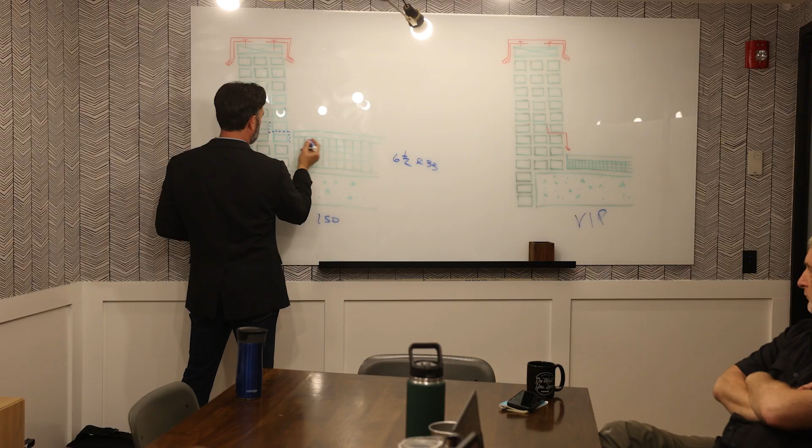I'm gonna ghost this in. So right now, down here is our existing. That's our existing cap flashing. We have 3 courses. So we go here, back here, 3 courses below the cap flashing. That's 8 inches. That's our old cap flashing. This is 6.5. This is actually going to get us somewhere, technically, somewhere over here.

A little bit lower. Now, why am I correcting? Because we're going deep in the weeds. We are going to go deep in the weeds. Okay. So that would be the polyiso choice. And as you see here, if the membrane is here, we have no base flashing. So we just said we need 8 inches of base flashing. So we have to go up 3 bricks.

Here's a rule of thumb. 3 bricks equals 8 inches. It's a rule of thumb. So that would put us up here. Minimum. Now, the question becomes, I only have 3 courses left. To do an in-wall cap flashing, and we're putting it here, I'm ghosting it in because we're not done yet. Now these bricks here have to come out.

How many courses of bricks do we need to take out for the in-wall cap flashing? I already gave you the answer, but 3. 3? 1, 2, 3. Now we have nothing left. There's nothing left. We got the coping up top. That's it. So what's the point? What's the point? This is where we're going to go deep.

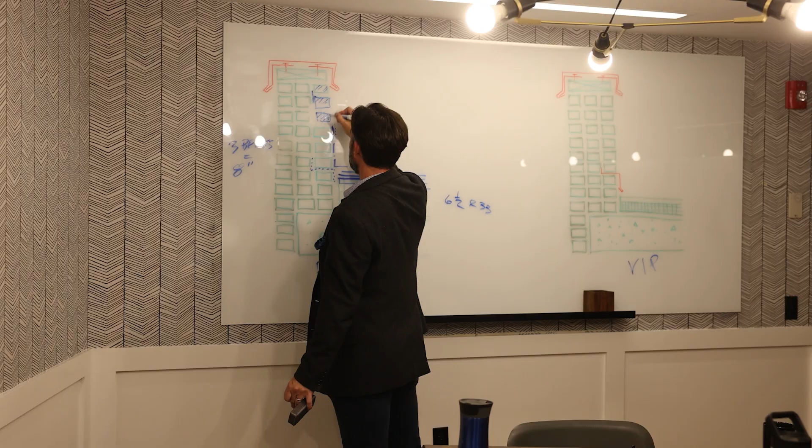And, if we were really going to do this right, we would have over here your weep tubes and all that other stuff. I don't see the point. So what I would prefer to do in this scenario, you know what? Let's leave it up. Let's leave it up because we're going to go to choice B. All right. This is choice 1, which I don't like. We're actually going to modify this.

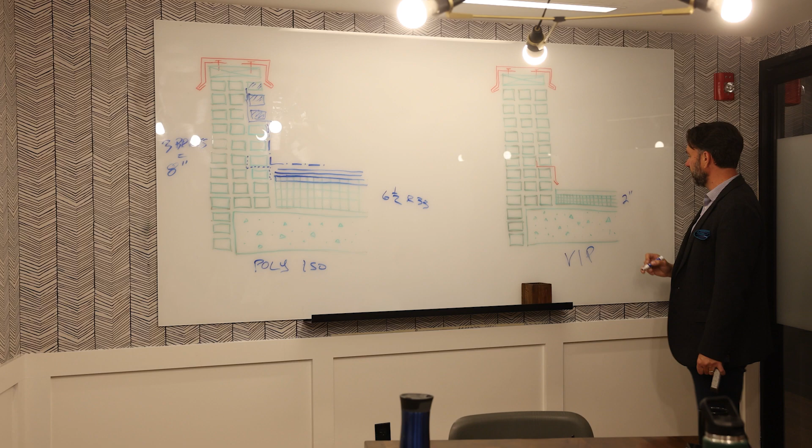Choice 2 is the vacuum insulated panel. This is a 2-inch panel. You have a 1/2-inch cover board. We're going to put a vapor barrier on the concrete deck. We're going to turn that vapor barrier up. Makes a tiny little bathtub. Actually, I would bring it all the way up. Boom, boom, boom, boom, to here.

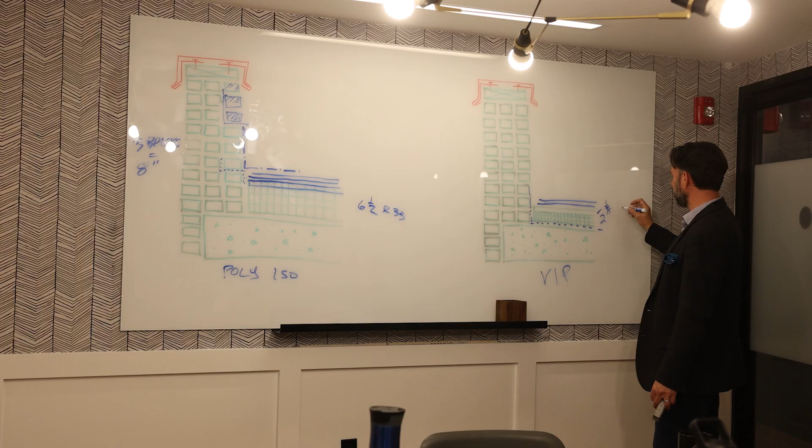Then, oh, wait a minute. Oh, here's our 2-ply. Oh, wait a minute, the cap flashing is in the way. So we still have to take the cap flashing out in this scenario. All right, so if this is 2 inches, 1/2 inch cover board, and then you got a couple of plies, we're going to call this 3 inches for conversation.

And let's just say 3 inches gets you to the top of the second brick, even though it's probably about halfway. Now I want to do my 8 inches above top of membrane, which brings me here. Which brings my in-wall cap flashing here. It's a 2-piece, but I draw it as a 1-piece. We're going deep in the weeds, like we said. Right, here's my little receiver. Okay, and this is our cap.

Now, we have to take these out. I say 2 instead of 3. For conversation, we're gonna go 2. So in this scenario, these 2 bricks are new. This remains. We're going to keep it. So this is going to be option 1. Option 2, I don't like this. I don't see why we're spending money to get that close to the coping.

And in this scenario, we're going to do the brick. This is PG-13, the brick shit house. Anybody know what a brick shit house is? Brick shit house, overkill. Overkill. Solid, overkill. Or, it's not overkill. It's robust. Robust, right? We don't say overkill. We say well thought, well planned. So I don't like this.

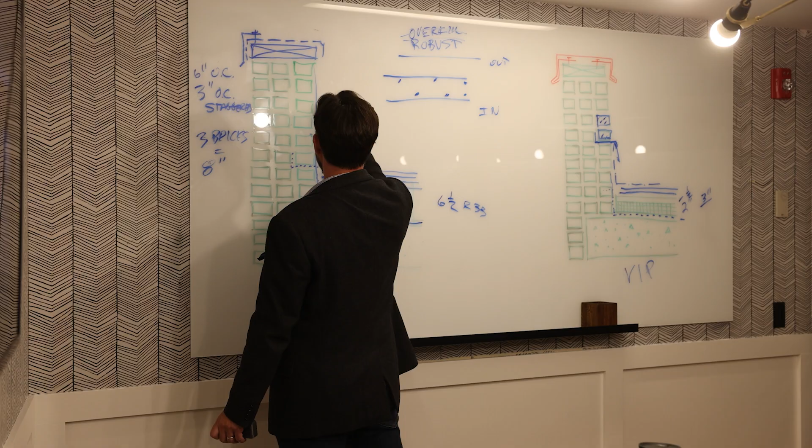Well, what we want to do is we want to bring the roofing up and over. So the question is, are we putting the PMMA, like I know it'll go on the brick, but does it want to go on the mastic? I don't know if we want to pay to take all the mastic off. I think maybe we're putting a base sheet, maybe a torch down sheet, and encapsulating it, okay? So let's say we do that for conversation. That would be down here. So let's say it's the base flashing sheet. We're going to go up. Then your PMMA is going to go this way. Up, up, up. And for conversation, we're going up and over.

Maybe I didn't want that cleat on there yet. We didn't want that cleat yet. Okay, I'm going to bring that up and over, and we're going to stop it like right there. Then we'll do our cleat. Let me get this out of the way. And then we're going to go coping. All right. Are we screwing the back or are we hooking the back? I don't know. It's up to us later. So the question, from a detailing point of view,

the PMMA waterproofing going up and over the whole thing, it's like an old clawfoot tub. Remember the old clawfoot tubs? Kind of went like this, right? It had a lip on the top. If you just have this, not as good, right? So we give it a little lip, boom, boom, boom, a little more protection. So that would bring the waterproofing up and over. So this is really one choice. Let's go back over here. This is the second choice.

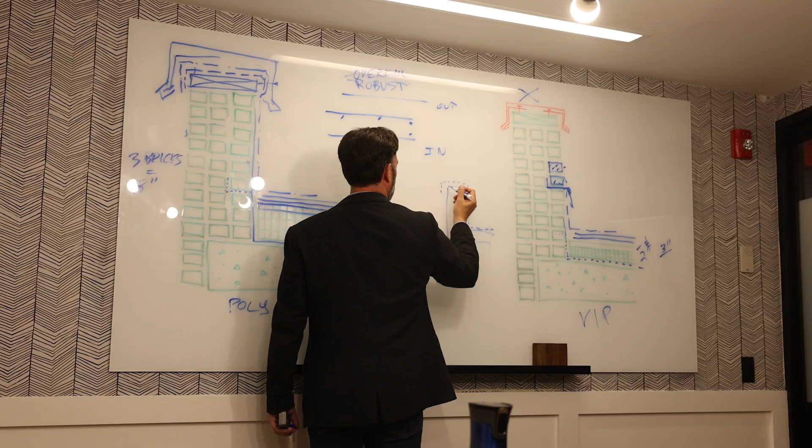Right? When we do other buildings and you have a very simple parapet wall, when we bring our roofing up and over, we always want to try to tie it on to the air and vapor barrier on the outside so that we get our overlap there and everything's all sealed nicely. This is brick, so it doesn't matter.

Super simple question about PMMA. Is PMMA always liquid applied? Yes, PMMA is always liquid applied. It's polymethyl methacrylate. It's a 2-part, call it epoxy. It's an acrylic that you mix and you add a catalyst and it turns into a hard but pliable membrane. Cures quickly.

So the question is, you have a low parapet wall. There's no insulation on this building at the moment. The cap flashing is roughly 8 inches above the deck. We have no insulation. We want to go back with R33. To get our 8-inch base flashing, if we go back with polyiso, it's going to be 6.5 inches plus a 1/2-inch cover board. We're at 7 plus the roofing, call it 7.5. So let's just call it 8 for conversation.

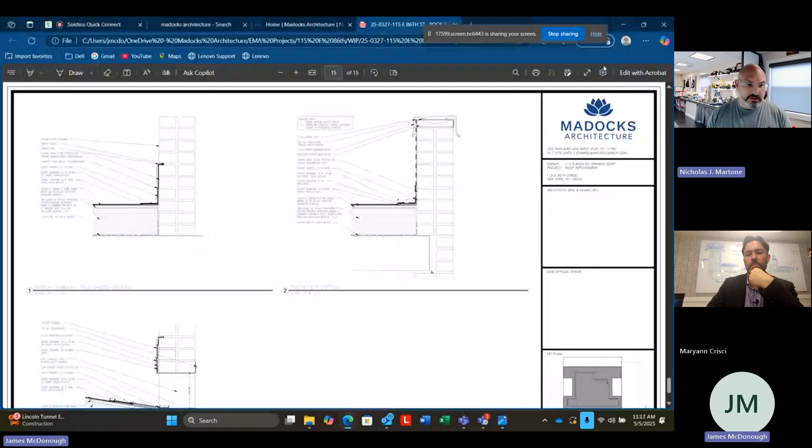Stainless and copper. There's other metals, zinc, lead coated copper. There's a number of materials you could solder, but the biggest reason not to use aluminum, I think, would be, yes, you can't solder it, and also it doesn't do well in masonry cement conditions like that. Right. Okay. All right, so let's say we're gonna go with stainless steel.

Let's say we're taking out 2 courses of brick, and we're doing a 26 gauge in-wall 2-piece counter flashing. Is that $50 a foot? No. Well, with the masonry removals? Yeah, with the masonry removals. Oh, then yes, for sure. At least $50 a foot. At least 50. Okay. So at least $50 a foot. Okay. And let's talk metal coping.

So let's go back to the detail. James, can you pull up the actual detail and zoom in on it? And then zoom in right there. So this is the detail that we're looking at. This is drawn with ISO. Okay. But let's look at the coping, and let's assume new pressure treated wood blocking, new Grace Ultra up over the top. And we like to do an .050 painted aluminum with a continuous cleat on the outside. Do you price that all up as one price? Yeah, it's one assembly.

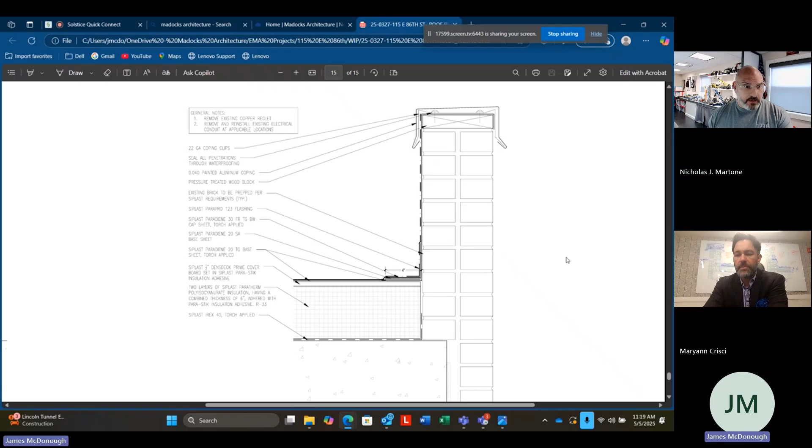Right. So there's a number of manufacturers that will sell coping, the edge conditions, as part of their package, depending if that's required for warranties. We usually shop fabricate ours. Sometimes you don't have all the wall widths, or you're waiting for the EIFS guy. Sometimes it's hard to get that material quickly from vendors when you need it. So it's a job-specific thing.

But even a shop fabricated coping has the same design, right? It might not have the ANSI SPRI sort of rating. So let's assume that it's just a shop fabricated .050, continuous cleat on the outside, 6-inch splice plates at every intersection, with 2 lines of butyl on either side, like we like to do.

So with the wood blocking and the waterproofing below, what are we talking a linear foot? Are we talking 30, 40, 50 a foot? Yeah, you might get guys that will do it for $40 a foot, and the coping, this doesn't seem like a very wide coping, so depending on your stretch out, you're definitely getting two pieces out of a sheet. You're going deep in the weeds. What you're telling people is, you have to manufacture this. You get the raw metal, right?

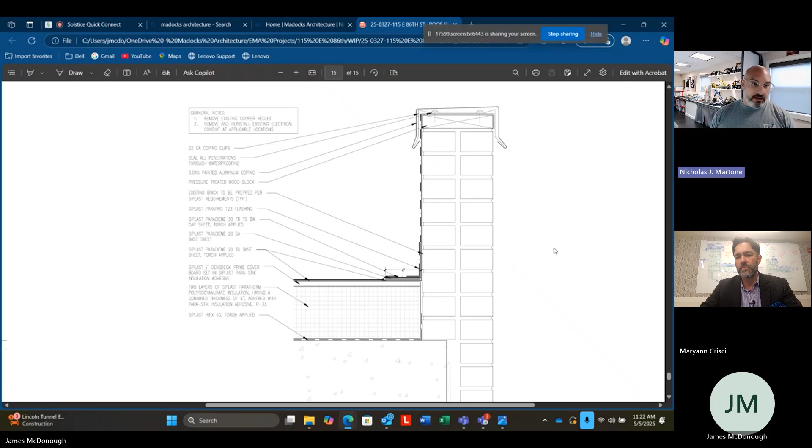Definitely much wider for energy code, right? You have a 4-inch cavity, you probably have an 8 to 10 inch CMU or concrete wall. So now all of a sudden, you have a very wide coping, and uplift factors, and we're always getting calculations as well. So all of those things increase that price. If you don't need calculations and you can use a standard color, and the wall's narrow, then I think $40, $50 is probably a ballpark number. Okay. So we'll just use 50 as a higher end number.

So for conversation, we got $50 on the coping. What did we say on the in-wall? Another 50? Yeah, sure. And 30 for the vacuum seal? Yeah. And when you look at ISO, 6.5 inches of ISO versus a 2-inch vacuum panel, do you have square foot numbers that you work with? Or do you just say it's 20% more, 30% more, vacuum versus ISO?

Oh, no, well, so say a standard ISO layout without the cover board, to get an R35, you're probably at $4 a square foot. Then it depends on how many layers of adhesive you need. The adhesive isn't cheap, right? The low rise urethane adhesives. A vacuum insulated panel, probably my costs are like $22 to $24. So that's a huge increase to do a vacuum insulated panel.

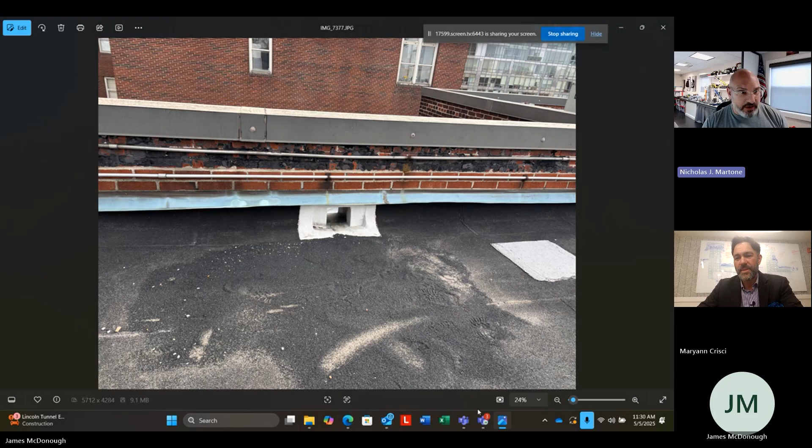We don't know what we're gonna find. No, we don't know. That's the exciting part about New York City construction. You never know what the hell you're going to find, and you always find some surprise. Whatever that surprise is, there's always something.

So, I think we're going to crunch a couple of numbers over here, and we're going to continue our conversation. Does anybody have any questions for Nick? Nick, do you have the linear footage price for putting that cement board on and then flashing up with the PMMA? Yeah, we didn't get a cement board PMMA price. Vertical square foot. So if it's a 2-foot wall, I almost would rather figure that in square footage, but that's fine.

Probably $25 to $30. Whereas if you didn't have the cement board, that's maybe only $1.50, $2 a material and not adhering it, but then there's more prep. So I would prefer to have the cement board because you have a nice finish. The PMMA on that old wall will telegraph through. So you're gonna look like you wrapped an old brick. Some bricks stick out a little bit more, as opposed to a nice, clean, new surface.

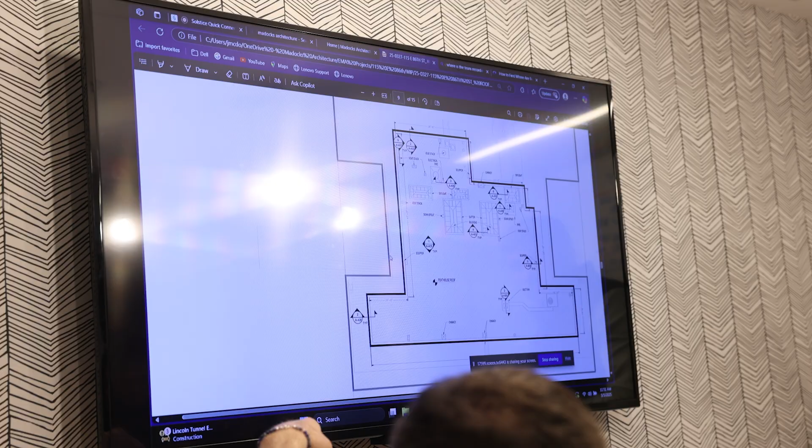If you zoom out. There you go, right there. Alright, yeah, it should be in the bottom left corner. Yep, you had it. Over here. Okay. Go down a little bit? Well, that's it though. No, but you want the area of the roof. We want to know the area. Go down, roof area, yeah. Go down a little more. Right there. Oh, no, you have it.

All right, so 39.4. 4,000. Times 35 for the ISO. All right, so hold on one second. So 4,000, somebody doing calculator? All right. 4,000 times 35, yep, and that's for the roof assembly and the ISO. 140. $140,000? Yeah. I'm just going to put 140.

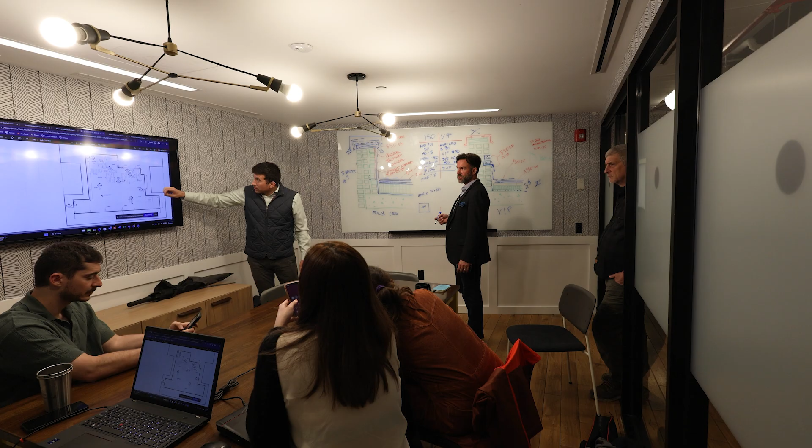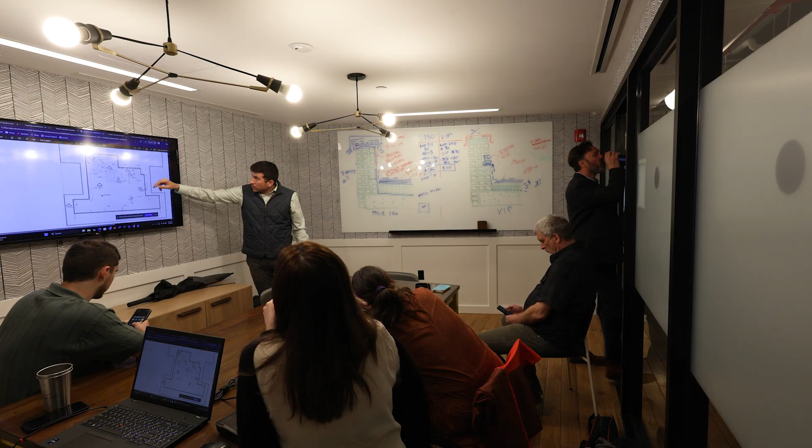And then what did we say the linear footage was? It would be 65, if it's a square. Well, it's not. So we're gonna have to add these numbers up. 14, 25. Can we polyline that, or is that too much? Just 14.5 plus, so 14 plus 25, all right, go ahead. Okay. Plus 8, 23, 13, 29, 47, 11, call it 14 again, and then can we just scroll down ever so slightly? 87.

271. So 271 times, and it needs to go up, 90. Wait, what was the perimeter? 271. That's it? That sounds low. All right, fine. 270. So 270 linear feet. Times, are we including the stone or are we just doing this right now? No, we don't know that. We don't know if the stone is there. Times 90? Yep.

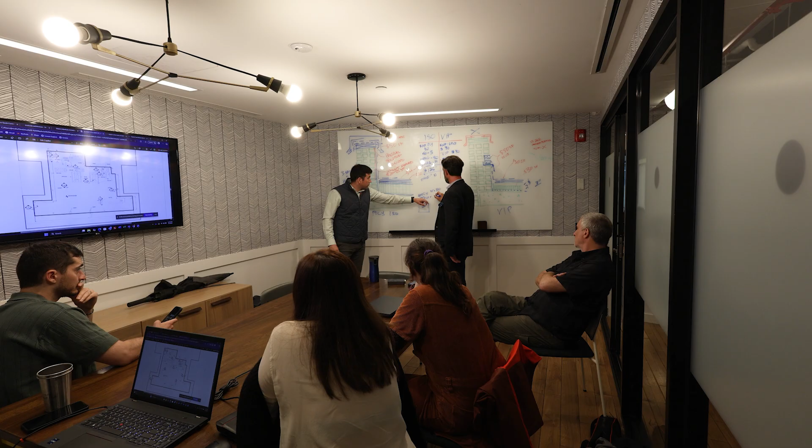24,000. 270 times 90. 24.3. That's way too low. 270 times 90? Yeah. 24,300. All right, fine. So the total would be, we're talking 164. Yeah. All right, let's go over here.

So the same. We got 4,000 times 60 this time. Times 60 is 240. Correct? Yeah, and then it's gonna be 270 times 50. 13.5. Okay. So we're talking 253.5. So you're almost looking at $100,000 in savings for a better repair.

Whoa, hold on. The deep in the weeds moment. How much? Almost $100,000 to do, in my opinion, the better detail because we're going up and over. And we got a new coping, new base flashing. What I don't like over here is this is all old. Could something go wrong? I don't know, but you know what this is? Change order. And it's also unknown.

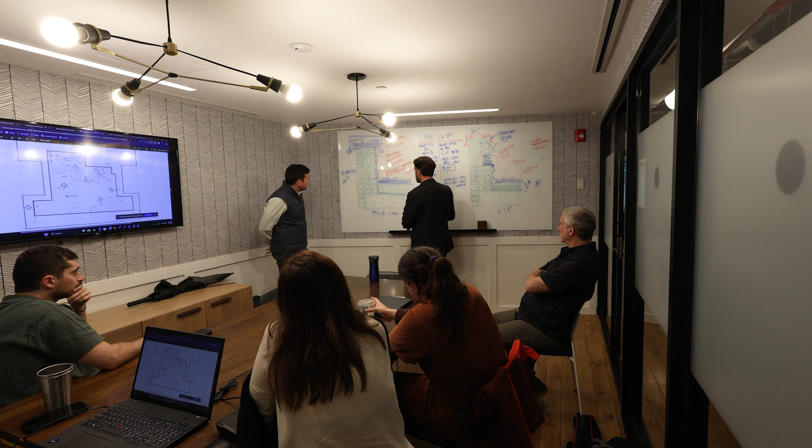And the other thing to think about on both of these, like Nick had mentioned, the only issue there is your outer wall. But with your $100,000 in savings, maybe you cut and point the wall. You could repoint this, and that's $10 a square foot, right? And now you have a nice, fresh, clean wall. And now look at all that blue. Blue is waterproof, up and over. Yep. Okay.

The verdict is in. Polyiso is the winner. By knockout. All right.

Do we drop the mic? Drop the coffee? That's it.